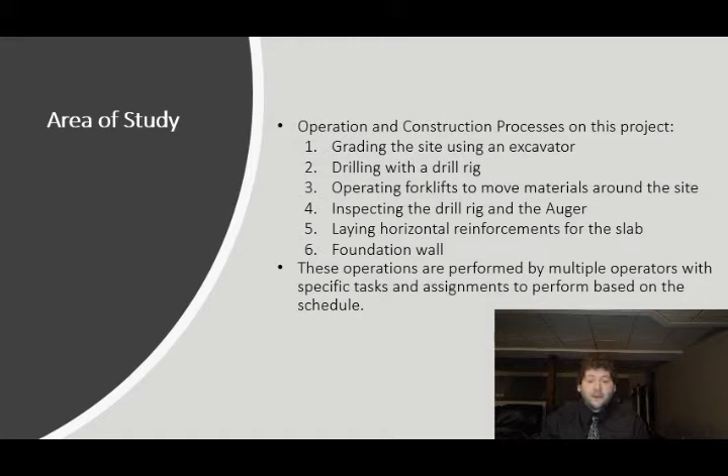In construction, a crew balance chart breaks down a typical cycle by worker activity. They show what each worker or machine is doing in a given cycle through a chart where the y-axis is time and the x-axis is each individual worker or machine and what they're doing on each time interval.

A process chart uses symbols to represent the flow of construction materials in a given operation. A flow diagram and a process chart go together.

To make a flow diagram, you first have to map out the area of operation and label where specific workers or machines are on the map. Then, you draw how materials flow throughout the map, labeling each change with the appropriate symbol.

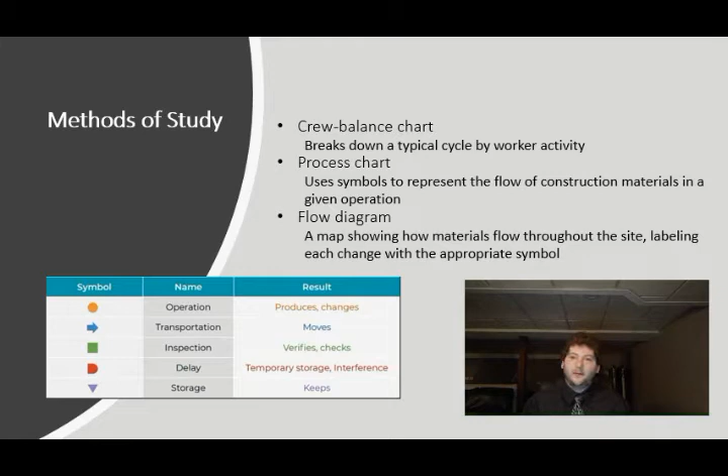A process chart is simply a chronological list of every symbol used in the flow diagram and what happens at each symbol. The site conditions of Auburn University's Central Dining Hall are currently in fair conditions.

There's one gated entry point where machinery and materials came in and out. The construction trailer was located in the center of the project, where construction managers and staff work at or report to.

When this video was recorded, it was on April 29th at 10:30 a.m. and the temperature was 72 degrees, and the site experienced weather of mostly cloudy skies and wind from the west at 6 miles per hour.

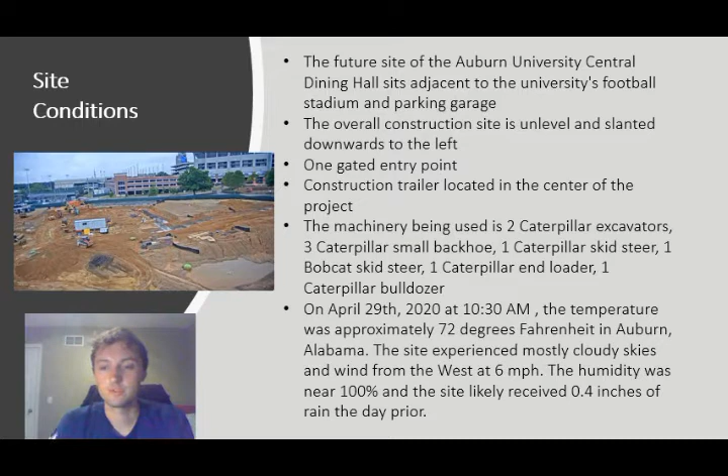The humidity was near 100%. This is due to rain that dropped 0.4 inches in total that occurred last night.

We observed large and small machinery on the site in the form of excavators and a drill rig for the large equipment, and smaller excavators, dozers, and loaders for the smaller equipment.

2 operators operated the small equipment, with 1 operator assuming responsibility for almost the entirety of the activities associated with the mini loader, and the other being responsible for the operation of the smaller excavators, while doing some miscellaneous shoveling or inspection activities in between excavation activities.

As only 2 operators seemed to be present, 50% of the smaller machinery on the site was mostly idle across the duration of the observation.

The most significant problems observed on the site have to do with the idle time associated with both workers and machinery, as well as with lacking efficiency of operation among operators and laborers.

Some of the main things we've seen were too many people associated with the drill rig, more than enough people responsible for inspecting the machinery, and those who stayed to assist in the operation of the rig left at some point during its operation, indicating that their time could have been better utilized.

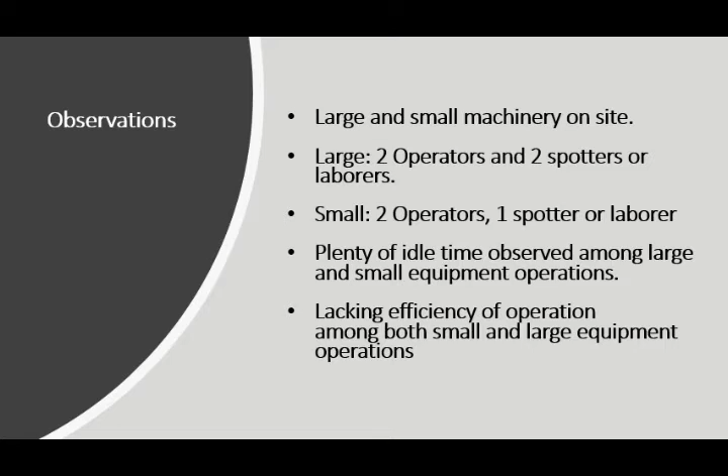Overall, there was an excess of smaller machinery since there weren't enough operators handy to perform tasks dependent upon the machinery, so the machinery simply took up space. In terms of efficiency, non-optimal occupancy of equipment or allocation of resources led to time losses.

After observing the site for an hour or so and understanding the problems with the site productivity, our group came up with 3 proposals. I'll be explaining the first proposal to you.

As you can see from the report, the original crew has 3 small equipments on the site employed for excavation purposes, with 2 operators and 1 spotter.

So we decided to increase the productivity of the overall crew and make the activity under consideration cost effective by limiting the number of workers and equipment on the site.

So the mini excavator 2 and 3 along with their operators are suggested to be released as per the new crew balance, and with it the spotter is also suggested to be released, who was present on the site throughout the whole hour but had no actual involvement with the productivity of the crew.

Also, proper management of the crew breaks is necessary in order to maintain continuity between the process and to reduce the lag time. This will help to improve the overall productivity of the site and the crew, and the same operation will be managed to be completed under 50 minutes.

So this will ultimately help to reduce the cost of the activity by 40% of its original value.

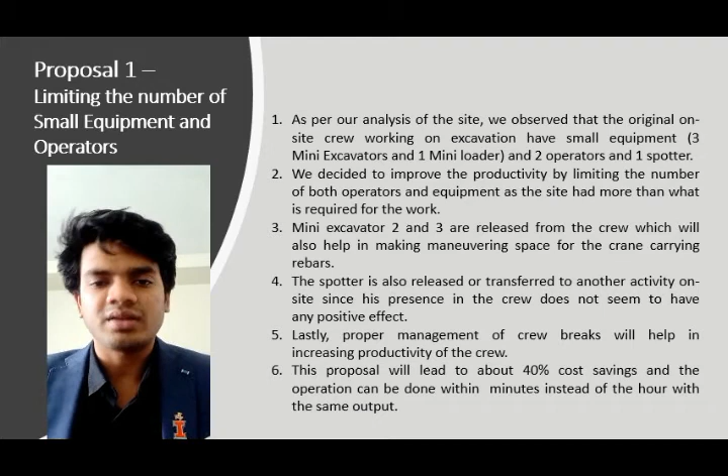A second proposal is change in large equipment strategy. Some of the crew and machines were underutilized while using the large equipment. As per the original crew balance chart for large equipment operation, it had 2 spotters, 2 operators, 2 excavators, and 1 drilling rig. The spotters only contributed for about 6 minutes of the whole overall operation time of large equipment.

Therefore, we suggest releasing both the spotters, and instead ask the operators to take care of their own machinery. Also, we suggest that one of the large excavators be released from its job because it's not being used enough, and this will not only help in saving a large amount of equipment hours, but will also specifically help in saving a large amount of equipment budget as well.

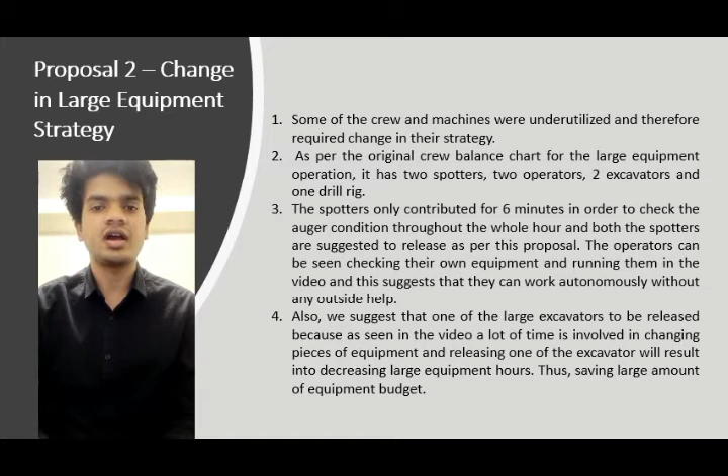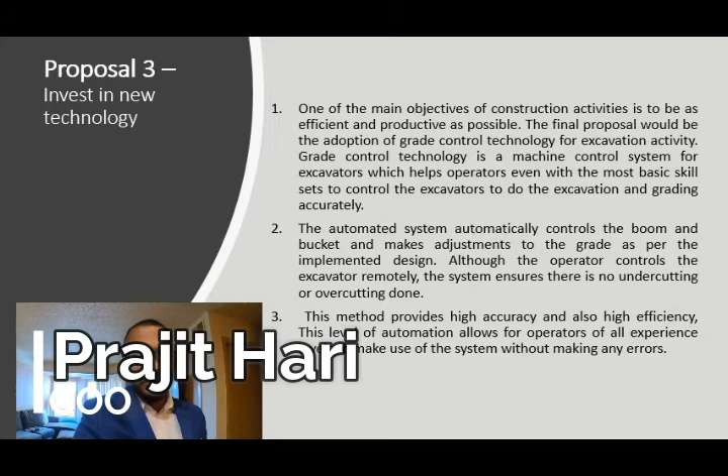So the third proposal we would like to make is to implement new technology. The final proposal chosen would be the adoption of grade control technology for excavation activities. Grade control technology is a machine control system for excavators which helps operators, even with the most basic skill sets, control the excavators to do the excavation and grading accurately.

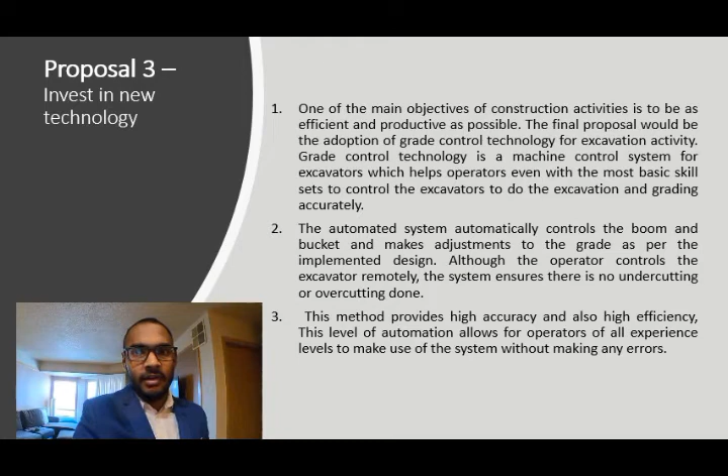Grade control helps speed up excavation process by communicating real-time grade information to the operators directly. This level of automation allows operators of all experience levels to use the system without making errors. Apart from speeding up on-field operations, automation through grade control has also allowed transfer of files from office to field at a much faster rate. Overall, there has been a 35% increase noted towards execution of on-field excavation activities.

There's often some amount of hesitation shown towards implementing this technology due to the initial costs involved. The truth is, one can expect a return of investment within 200 hours of usage. So we believe this is definitely the way to go.

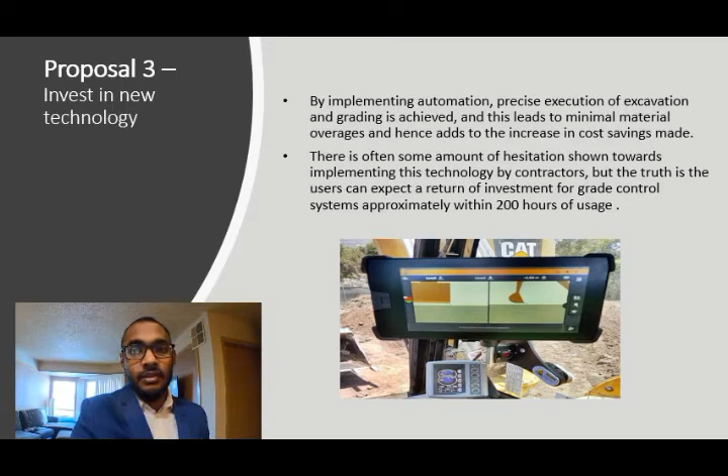So the first proposal includes decrease in crew size and small equipment. The present crew involves 2 operators, 3 excavators, 1 labor and 1 front loader, and the unitary cost comes out to be $2.75 per cubic yard. But in our proposed crew, there would be 2 operators, 1 excavator and 1 front-end loader. That will decrease the hourly operational cost to $166.5 per hour and unitary cost to $1.66 per cubic yard.

The second proposal involves the changes in large equipment. The present crew for large equipment involves 2 operators, 2 excavators, 2 labor and 1 drill rig, with current hourly operational costs of $303 per hour and unitary cost of $1.89 per cubic yard. In our proposed crew there would be 2 operators, 1 excavator, 1 drill rig, and the hourly operational cost would come out to be $166.5 per hour, and the unitary cost would be $1.68 per cubic yard.

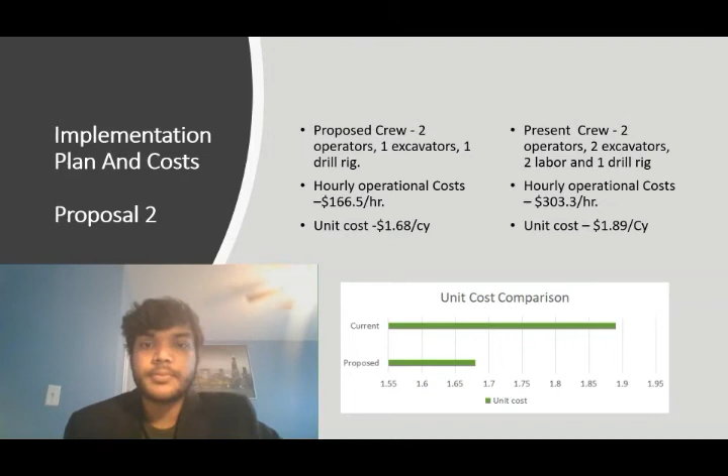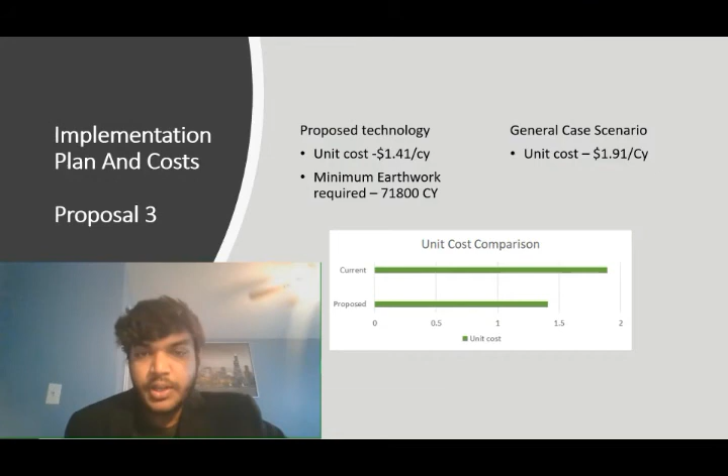The third proposal involves the introduction and adoption of grade control technology. As a result of using grade control technology, efficiency can be increased up to 30%. In the general case scenario, the unitary cost for earthwork from small excavator is $1.91 per cubic yard, but with our proposed technology the unitary cost will come down to $1.41 per cubic yard. However, the minimum earthwork required is 71,800 cubic yards to break even on the investment cost for this technology.

After extensive observation of the construction site of the Central Dining Hall at Auburn University, Team Europe has come up with 3 proposals to improve productivity as well as reduce project costs. The first proposal limits the number of equipment and personnel at the site, bringing the cost down by 40% to $1.66 per cubic yard per hour.

The second proposal suggests changes in the large equipment strategy of the project, and it will bring the cost down to $1.68 per cubic yard per hour. The third proposal talks about the implementation of new technology called grade control technology, which will be beneficial for the project if the total excavation of the project is more than 71,800 cubic yards.

If given a choice, Team Europe would choose the first proposal as it requires the minimal amount of effort, but provides a lot of financial advantages to the contractor. Thank you.